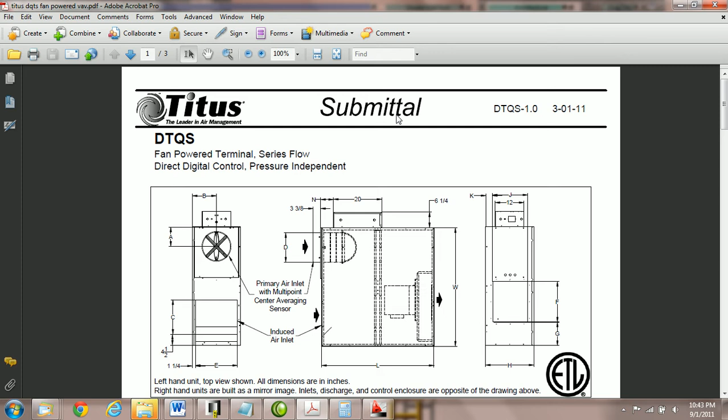We're going to follow this Titus submittal sheet, DTQS fan-powered terminal. You can see it's a round inlet, a rectangular outlet. We've got all the dimensions and parameters we need here.

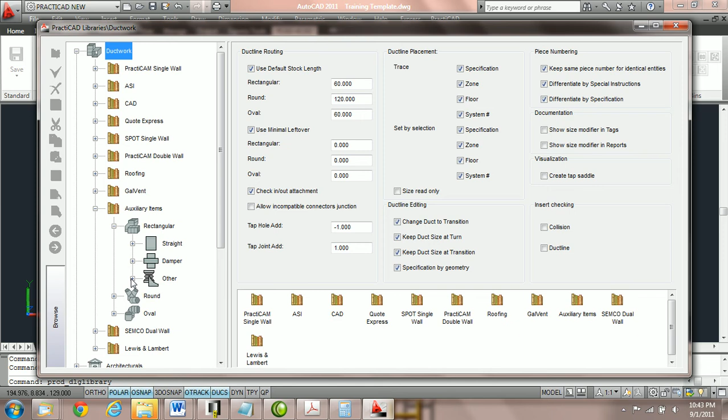So what we're going to do now is go into PractiCAD, into our library icon right here, into our ductwork libraries, and pull out a VAV box. We're going to go into auxiliary items, rectangular, other, and choose the SD VAV box round with straight.

This has the round inlet we need. It's also got a rectangular outlet which can be offset. It's got a control box on it, so it's going to work well for what we're trying to do.

I'm going to open up our screen a little bit. Now what we're going to do is come up to all catalogs, hit the green checkbox, and create a new catalog. We'll just call this PCAD Titus fan box.

And then we're going to give it a name, and we're going to name it 6-inch Titus DTQS Unit 2. I like to put the name here so that when we create a catalog, I can get that drop-down list and know that it's a 6-inch Titus DTQS Unit 2. I'm also going to make sure I keep everything in capital letters to stay consistent with the names of all the other catalogs.

Now there's a lot of parameters associated with VAV boxes. You've seen this in earlier tutorials. Fan boxes have some tricky offsets as well, so we're going to go over each parameter one at a time.

First what we're going to have here is obviously the width out, and we can always see what the width out is by just scrolling. You can see that is obviously the width out. I'm going to change my preview here to isometric. We can see that the width out is the out and the depth out is for that straight out.

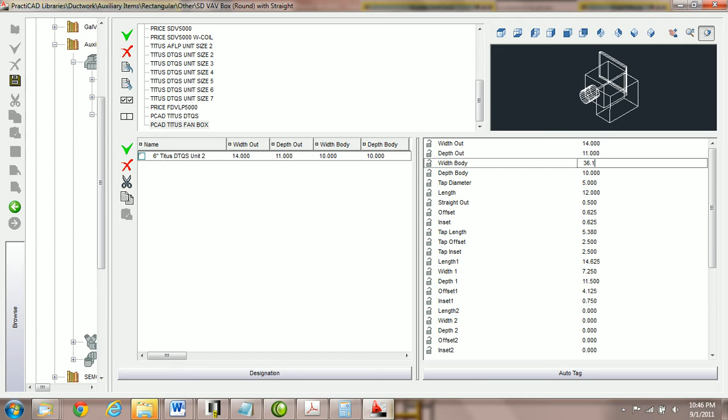Then we're going to go to the width on body, depth on body, and go back to the submittal sheet. Here we can see that the width is going to be 36 1/8, represented by the W, and then we've got H for the depth, which is going to be 17 1/8. So we're going to come in here and say width on body is 36.125, and the depth on body is 17.125.

Notice that I have AutoCAD format set to decimal, and I have the precision set out to 3 decimal places. This way I can put in those 1/8 of an inch. If the format is set to just 0.0 precision, I'm not going to be able to put in the 1/8 of an inch we need. So before you start designing fan boxes, VAVs, or equipment that requires 1/8 of an inch, I'd recommend changing the format precision in AutoCAD format units. There are tutorials on that.

So next thing we're going to do here is choose the tap diameter and length. The tap diameter we know for this one we're going to use is 6. And once again, we're going to use the nominal size for this particular fan box. Sometimes the diameters can be smaller.

We want it to report as 6-inch, so we're going to use it as 6-inch. We also want duct that attaches to 6 inches to be 6 inches, so we usually go by the nominal size. The length we're going to get off the sheet, it looks like length will be L. That's going to be 40 7/8 long. So we're going to come in here and say length will be 40.875.

Straight out, we can put whatever we need. It could be 0. I'm actually just going to put it at 0.1. That's the distance - you can see the length of the straight out. It's going to put a tad little edge, but you could have it longer or at 0 if you need to.

Now what we have is the offset. This is the offset, as you can see as I move it. This is how far the offset is for the back straight. I'm going to set it to 0. Now you can see that 0 is obviously from this side. So as I type in 2 inches, that means that the side of this wall right here is 2 inches from the back of the box.

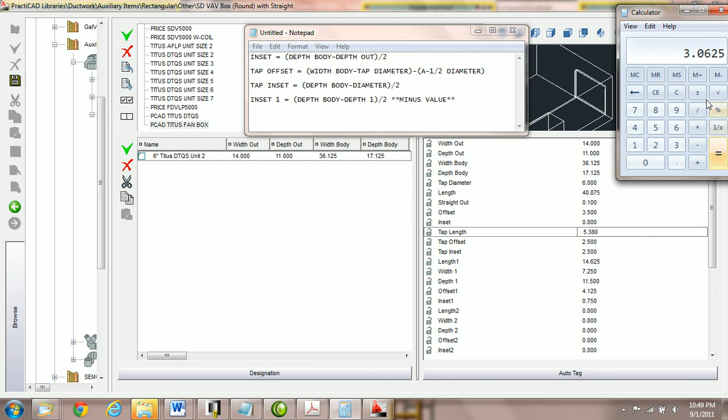So what we're going to do is just come up to our calculator and say depth on body is 17.125, getting that number from right here. And then we're going to say minus the depth out, and the depth out is 11. And then we're going to divide that by 2. That's going to be 3.0625. And that's what our inset's going to be, 3.0625. And we're going to hit enter. Notice that because it went out to 4 decimal places and my precision is only 3 decimal places, AutoCAD rounded this to 3.063. So if you wanted 4 decimal places, change it in your format precision.

Now we've got tap length. Tap length should be already listed. We can see right up here that it says 3 3/4, and that is the distance of the tap. Seems to be consistent everywhere. So we're going to go back here and say that the tap length would be 3.75 for 3 3/4. And tap offset.

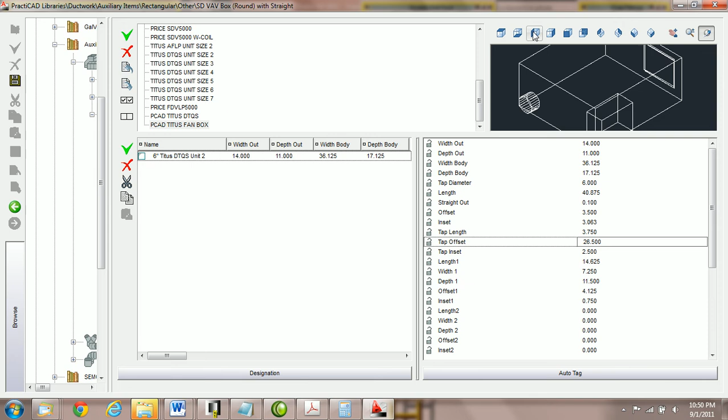Now, tap offset is going to be the trickiest one of all. The fan box actually has the tap basically on this side. And we're going to zoom in a little bit. We're actually going to put this in the left view. It's always good to change your view. You could see here if we take the tap offset and we set it at 0, that it's actually flat against the wall.

So if we actually take the entire width of the body and subtract the diameter, that number is going to be the space we have left. But the PDF sheet is giving us a parameter here for A, and that's the distance from the other side of our fan box to the center. So we do have to write a little formula here. And you'll want to do this one time, and then every other fan box of this type will be easier.

Depending on what information is given to you by the manufacturer, this will affect what the formula is. In this tutorial, you can see that we've got A, which is the distance from the edge to halfway through the diameter. So really, A is 6 inches right here. That's the one we're using.

You know that the diameter is 6, so there's 3 inches between the center of this diameter and the end of this tap, which means the remaining gap here would be 3 inches. If you put this together, you can pause to go over this and see that the tap offset parameter is going to be the following formula.

It's going to be width of body, the whole width of the body, minus the tap diameter, and then you subtract the difference between the parameter A and half the diameter. Take a minute to pause this and read over that to make sure you understand. It might be different on a different submittal - they might go off the other side, but our system's actually going off of the right side.

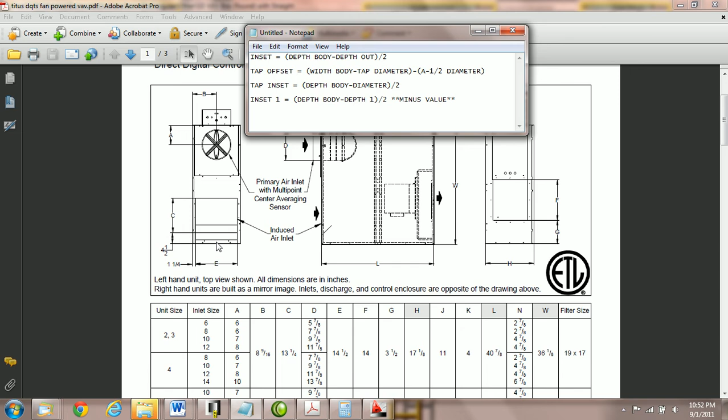So what we're going to do is come back here and calculate that tap offset using that formula. We're going to go to our notes, open up our calculator, and say okay, the width on the body is 36.125. We're going to subtract the tap diameter, which is 6, and that gives us a number.

Now from that, we need to take the parameter A, which is listed as 6 on our PDF submittal - that's right here, A is listed as 6, and that's the distance marked right up here. So we're going to take A and subtract half the diameter. A minus half the diameter, which is 6, is going to be 6 minus 3, and that is what we need to subtract off this number, according to our formula.

Tap offset - so we're going to put in 27.125, and that is the correct value, 27.125. And that's where this should be in terms of left and right.

Now we've got the tap inset, which is going to be up and down, and once again I'm going to set this to 0. Here on our submittal sheet, it's actually just telling us this parameter for B, but that's also going after the center line as well, and once again our taps are working off the edge.

So what I've got here is I've also got a formula for the tap inset, and it's just going to be the depth of the body minus the diameter divided by 2. That's usually the same for almost all fan boxes and VAVs.

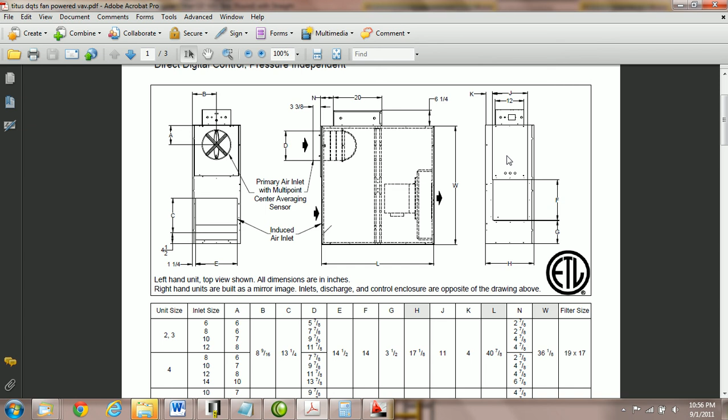What I'm going to do, notice here it's marked as a minus value. The reason why is you can see this box is smaller than the fan itself. Inset being 0 is at the top, and if I move it negative, it moves down. So that's why I've got a minus value here. Take a minute to look at the formula for inset 1 here: the depth of the body minus depth 1, divided by 2.

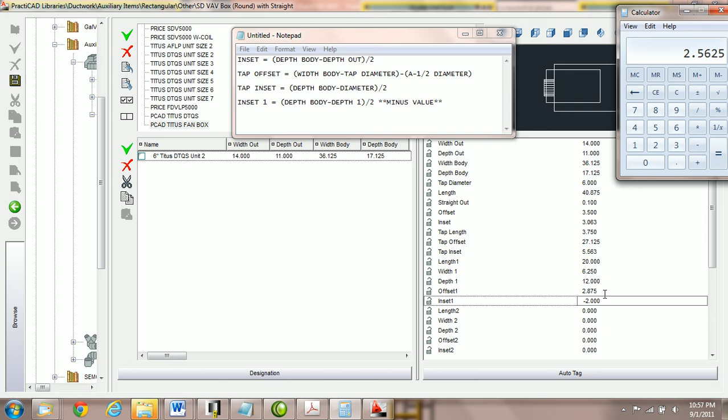So we'll go up to our calculator. We're going to say depth body, which is 17 1/8, minus depth 1, which we know is 12. We divide that by 2, and get 2.5625. But we need to do that negative. If we do it positive, it's actually going to go up. You can see here, inset, we want a negative 2.5625. That right there puts the tap perfectly centered.

So I've got this little formula sheet that we've got here to calculate. After that, it gets pretty easy. We don't have a second control box.

So length 2, width 2, depth 2, offset 2, and inset 2 are going to be set at 0. We've got the hole width, depth, offset, and inset. These are once again fabrication parameters for the hole. PractiCAD will cut it if you're downloading these. Most contractors are not, so most of the time they're set at 0.

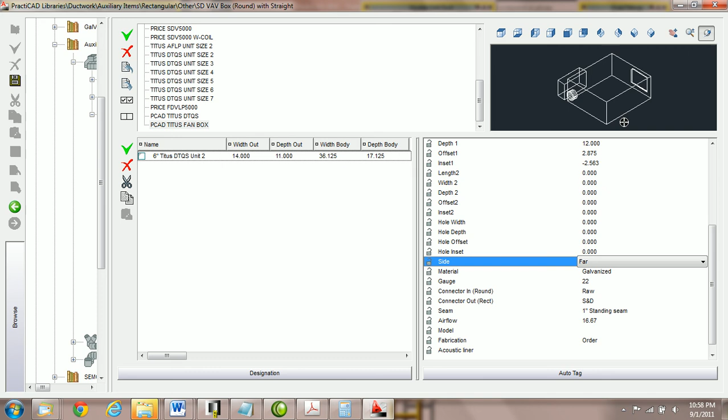We're going to choose the control side. In the picture, they've got it on the far side. Here we've got it on the near side. So you can always change it to what side you want, on the fly. Near is going to be on the right side based on airflow, and far is going to be on the left. It's all about the in connection, so we've switched it to far.

Now we're going to choose the material, gauge, connector in, connector out. This is going to differ between contractor. Airflow we're going to set at 0, but we could put in a CFM if we'd like. We can give it a model number here. Once again, choose the fabrication level, and then if we do need liner on the outside, it could be done with liner insulation.

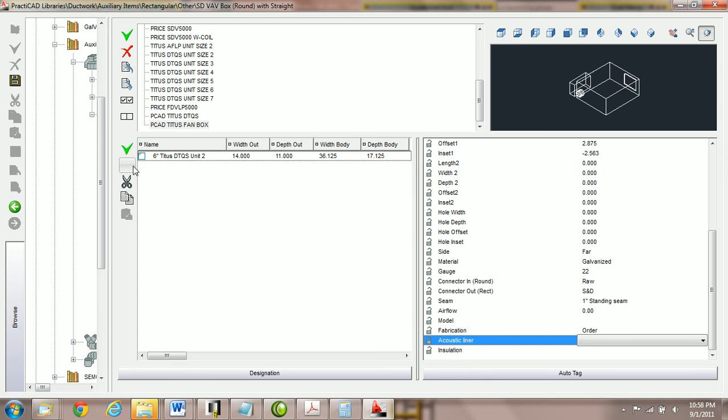Once we've designed this one, what we're going to do is just copy it by highlighting the one we've created, then typing in 8-inch Titus DTQS unit size 2. And then what we're going to do is make the changes. Obviously between fan boxes, very few parameters change, so a lot of these will stay the same.

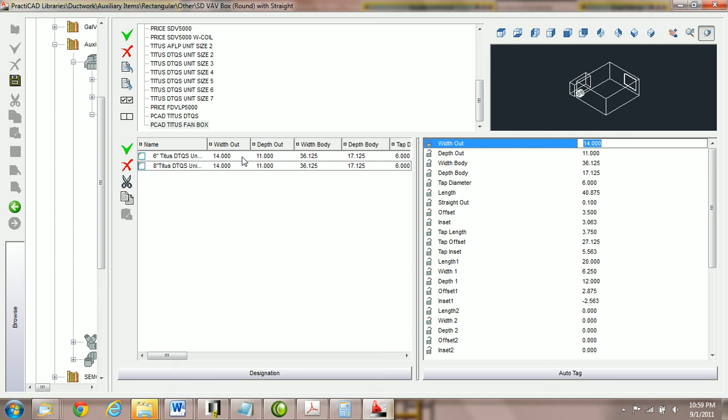Once we've designed our fan boxes, we're going to hit save, and then we're going to drag this catalog off into our bin. Then I'm going to exit out of the library by using the close key right here. Now we can go into our bin and we're going to have a catalog of Titus fan boxes. Obviously the 8-inch one we need to adjust, but here we have our 6-inch fan box. We can hit place, and now it's ready to go, and we can just put it on the drawing. And that concludes the tutorial on building a fan box.